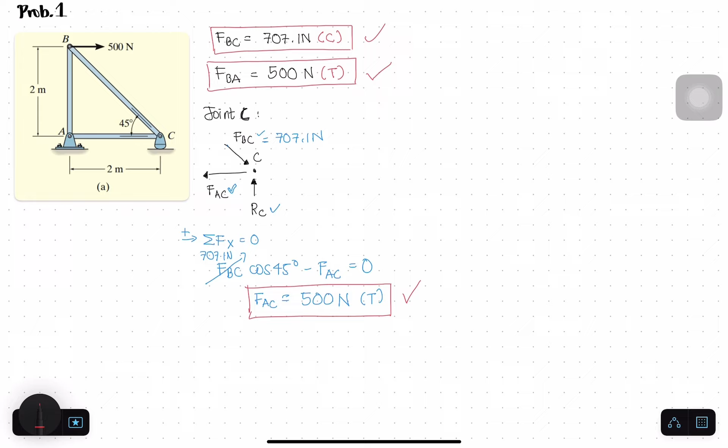Member BC, ito yung force niya, compression. Member BA or AB, ito yung force niya, 500 Newton, and it is in tension. And then member AC or CA, 500 Newton in tension. So if you want to solve for RC, you can do that by summation of forces along Y. So that's for problem 1.

Let's proceed to problem 2. So this is problem 2. Ano ba yung sa problem 2? Again, we are to determine force in each member of the truss and indicate if the members are in tension or compression, using ulit method of joints.

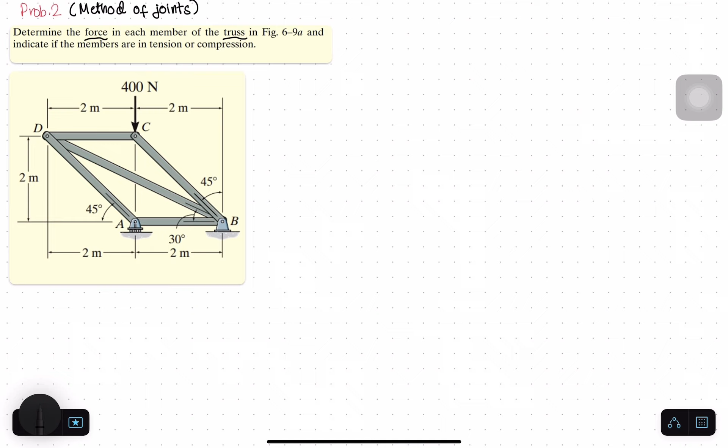Method of joints. Ang kagandahan din sa method of joints, makukuha natin talaga yung bawat forces in each member kasi step by step tayong nagmo-move from one joint to another. So kaya yung mga tanong din natin dito under method of joints is yung mga forces lahat in each member of the truss yung pinapahanap. Okay, again, always indicate kung tension ba or compression.

Meron tayong support reactions coming from point A, so isang roller and a pin. Now, saan tayo pwedeng mag-start na joint? Dapat at least one known force and at most 2 unknown forces. So, sa joint D ba pwede? Hindi, no? Lahat yan unknown forces yung nandyan.

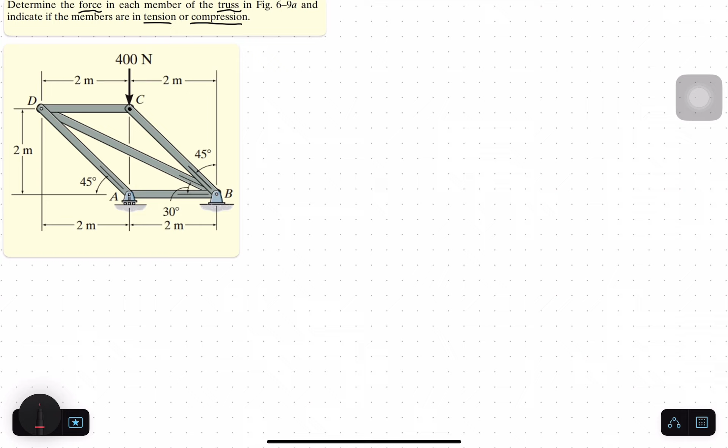Sa kuan kaya, hindi rin pwede. Saan ba maganda? Masyadong marami sa joint B na unknown. So, I think much better to start with joint C. Kasi sa joint C, you have one known force, 400 Newton, and then dalawang unknown force which is force CD and force CB.

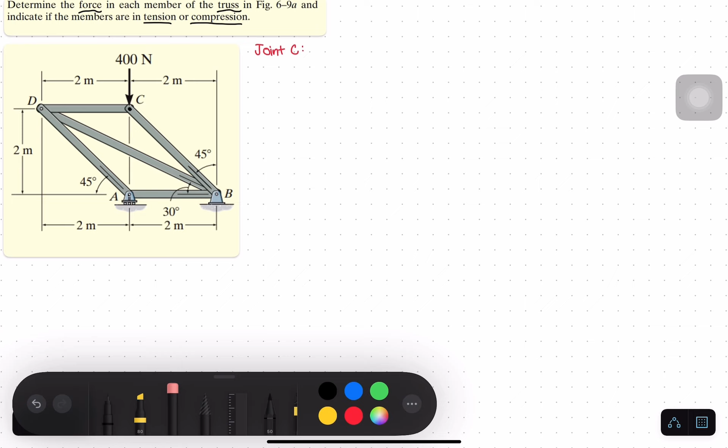So, dyan tayo mag-start. So, starting with joint C. So, this is joint C. Sa joint C, meron kayong 400 Newton. Tapos, yung FCD,

ano ba siya? Tension or compression? And then yung FCB, tension or compression. So, dito, mag-start na tayong mag-assume na lang. Kasi diba, ayon sa dalawang possible methods that we can do, yung sa method number 1, pag complicated na, hindi mo na kayang i-inspect, you can assume na lang. Okay? So, pwedeng mamali tayo ng pag-draw ng correct sense. So, assume lang in first.

So, itry natin ngayon. So, let's say, ang in-assume ko, yung FCD is papunta dito. FCD. While yung FCB naman is papunta dito. Even though, kung ma-analyze nyo yan, pwedeng mali siya, pwedeng tama, basta in-assume lang natin yan. Ayaw lang natin sumakit yung ulo natin sa pag-inspect. So, we have FCB.

Okay. So, ano yung angle dito sa FCB? If this is 45 degrees, this is also 45. So, 45 degrees dito. So, ano yung pwede nating unahin? Summation of forces along Y.

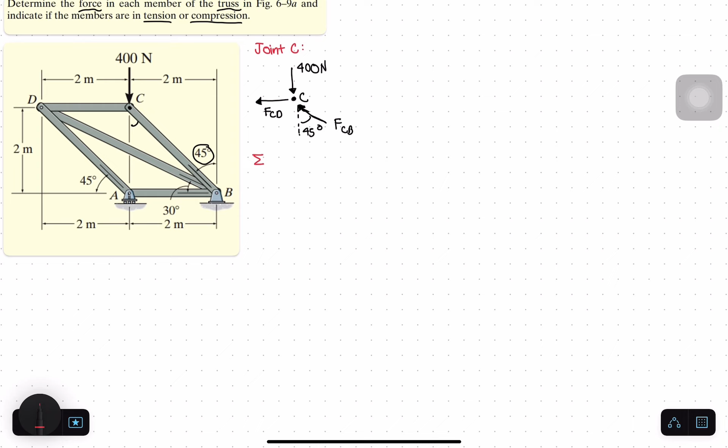Muna tayo. Try natin. So, we'll have along Y, negative 400 Newton. And then, plus FCB cosine of 45 degrees, equals to 0. FCB cosine of 45 degrees.

Then, ano pa? Ma-compute na yung FCB. So, ang lalabas using your calculator, it's 566. So, i-try ko negative 400 plus FCB cosine 45 equals to 0. 566 yan, Newton. So, positive yung lumabas.

So, ibig sabihin, tama yung nasa FBD. So, it's compression. So, lagyan natin, its nature is compression. So, we box that one.

After FCB, mag-summation of forces along X tayo, may makukuha tayo na isa, yung CD. X equals to 0. So, positive, you will have negative FCD, then minus FCB sine of 45 degrees equals to 0.

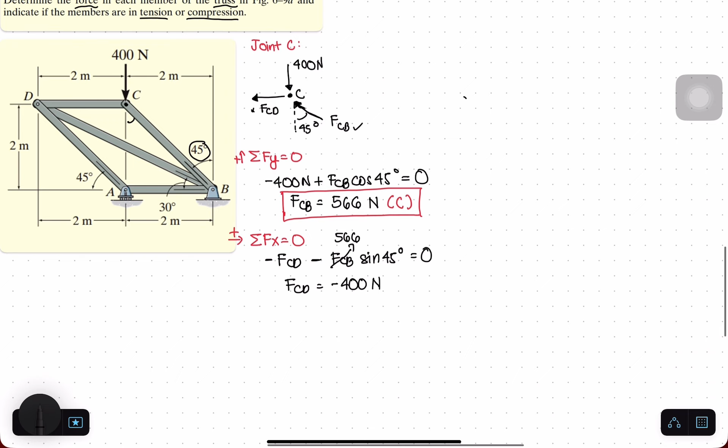So, we'll have ang FCB, alam na natin, it's 566. So, ang lalabas na FCD is negative 566 sine of 45, negative 400 Newton. Ibig sabihin, yung na-assume natin dito, kasi hindi tayo nag-inspect, kasi gusto natin mapadali yung buhay, so i-reverse, dapat i-reverse. So, compression dapat siya instead of tension. So, you will write FCD equals to 400 Newton, compression.

Okay, so we have determined FCD and FCB. So saan naman tayo pwedeng mag-move na joint? Saan nyo gusto? We can move at joint D. Joint D na lang, kasi dito sa joint D...

Known na to - 1 known force and then 2 unknown forces. So you have joint D. Yung FCD is dapat compressive, so pagpunta dito sa joint D, dapat pushing on the pin also para maging compressive. So FCD equal siya sa 400 Newton.

Then yung dalawa, yung FDB at saka FDA. I-assume natin, kasi ayaw natin sumakit yung ulo natin. Let's say ito yung FDA, tensile lang pag-assume natin, while the other one is compressive, that is FDB.

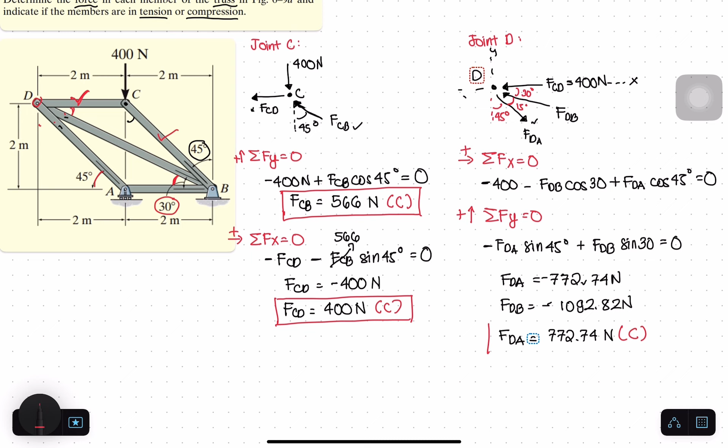So i-correct natin. FDA is 772.74 Newton, so ito siya. Hindi daw siya tensile but compressive, so you will write compressive. So you have that one.

Then yung FDB naman - 1092.82 newtons. Reverse dapat sa na-assume natin, so if it's compression, kailangan tensile. So T, i-box natin.

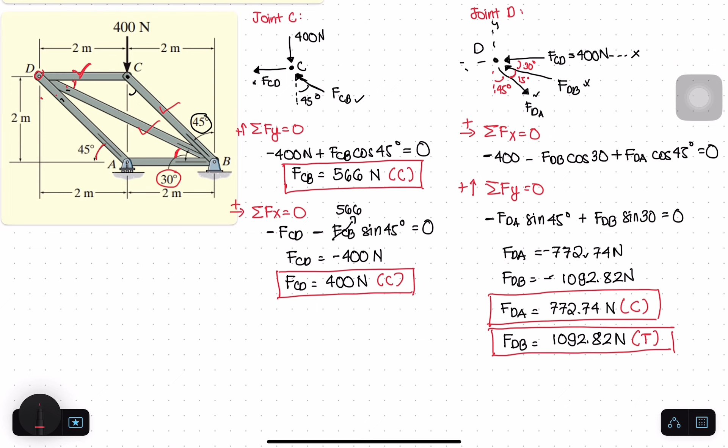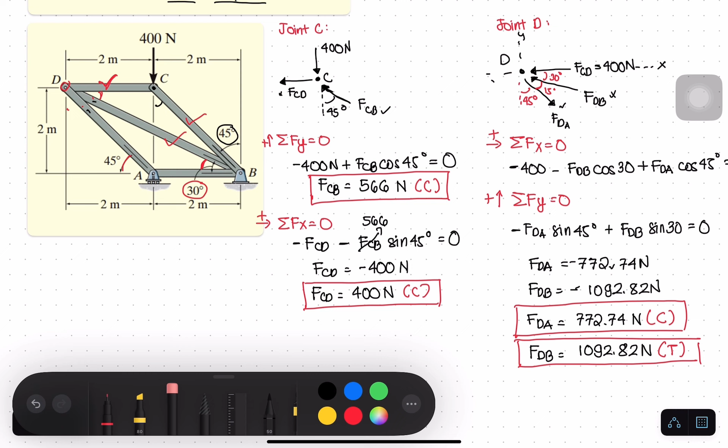So nakuha na natin yung dB and dA. Saan yun? Ito pala, dA. Wait lang, erase natin to. Bakit hindi siya ma-erase? Ayan.

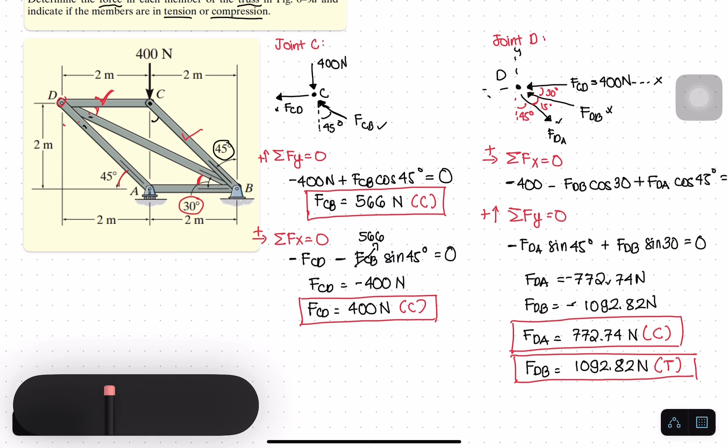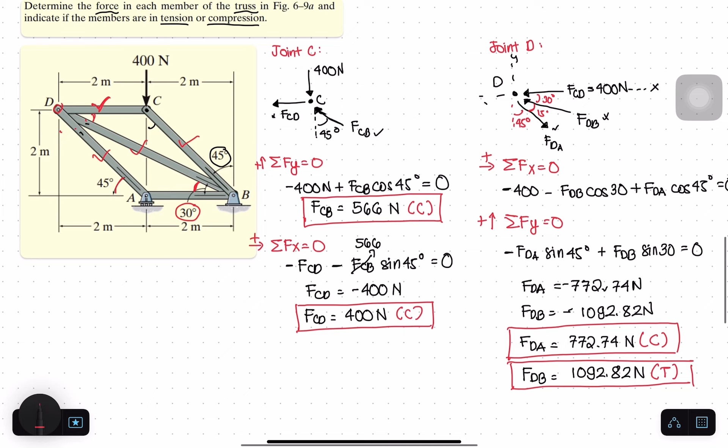So tapos na natin yung dA and yung dB. Ang hindi lang natin nakuha is yung sa AB, force sa AB. So doon tayo titingin sa joint A. Considering joint A, you have joint A. Ano-ano yung nag-a-act sa joint A? Isang reaction coming from the roller, so RA, and then force due to member DA, which is nakuha natin compression, so compression din natin dito sa joint A.

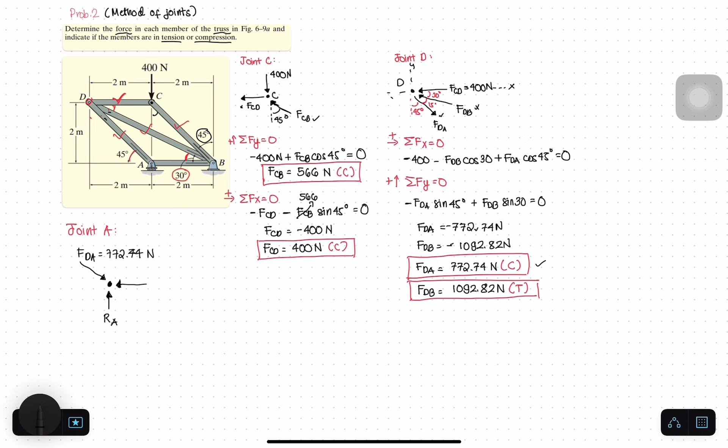So FDA, which is equal to 772.74 Newton. Then yung sa AB or BA, by inspection, it's compressive para ma-counter yung positive X component ng DA. So you have FBA. Then para makuha yung FBA, summation lang tayo.

Forces along X equals to 0, kasi dyan makikita yung, or dyan ma-include yung unknown force in member BA. So you have negative FBA, then plus 772.74. Yung X component niya, that is what - cosine or sine? So cosine of 45 degrees, so equals to 0.

So solving for BA, you will have 546.41 Newton, so positive siya. Ibig sabihin, tama yung nasa FBD natin, so it's compressive.

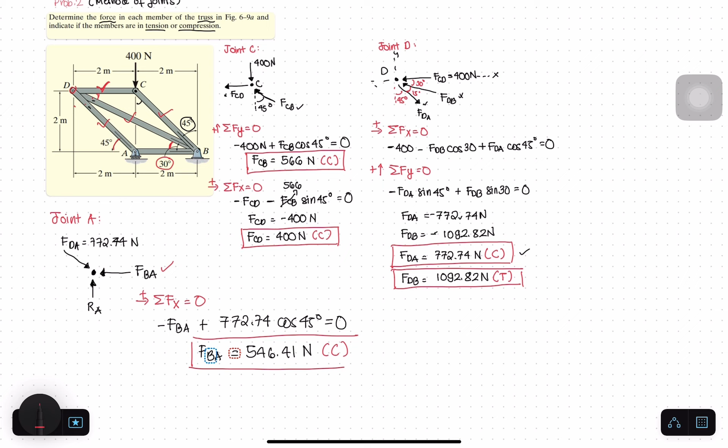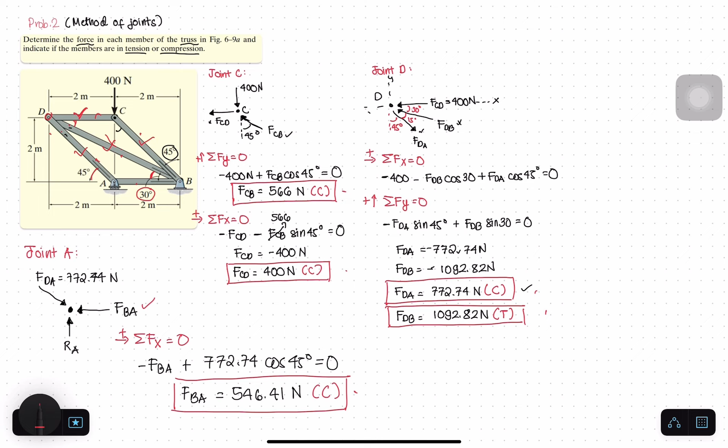So yan yung answer sa problem number 2. We have determined the 1, 2, 3, 4, 5 unknown forces in each member of the truss, and we also determine its nature, tension ba or compression.